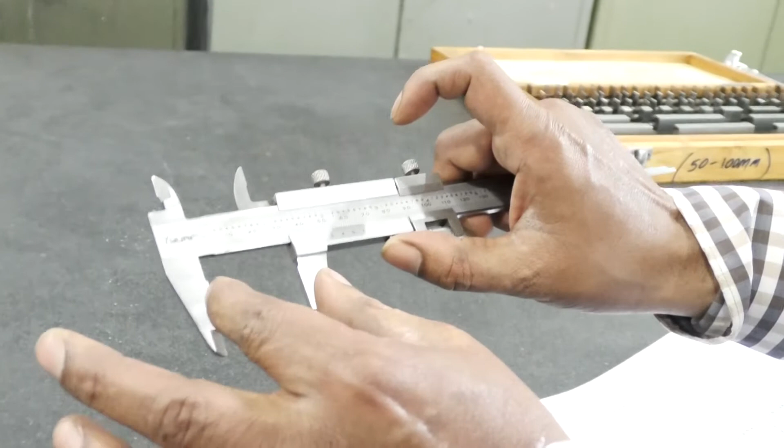Okay. So, vernier caliper, it has two jaws, totally four jaws, and top side two jaws. These are used to measure the inner diameter. So these two jaws we use to measure the outer diameter or outer width also. For example, these two are used to measure inner diameters. Okay, so we can measure outer thickness like this one, by the help of the vernier caliper.

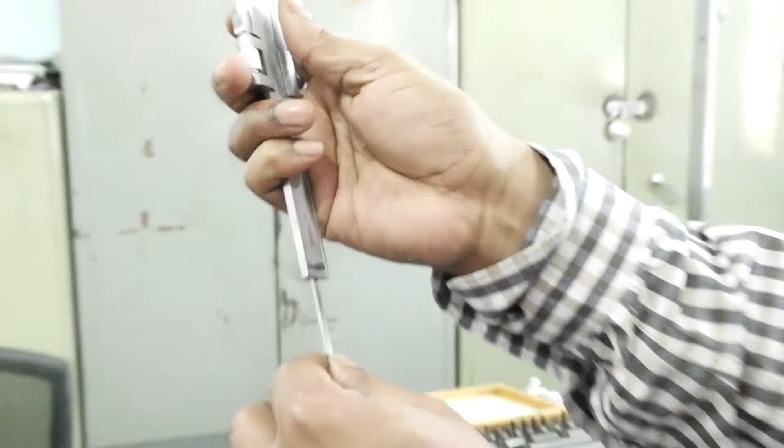So these are the locks to fix the values, locking up the vernier scale and locking up the main scale, to check the readings without any disturbances. So that is the vernier caliper. This strip is used to measure the depths. So that is the main advantage of the vernier calipers.

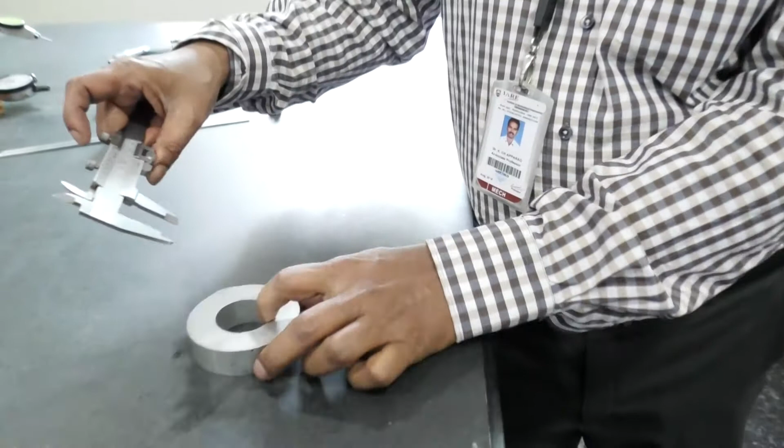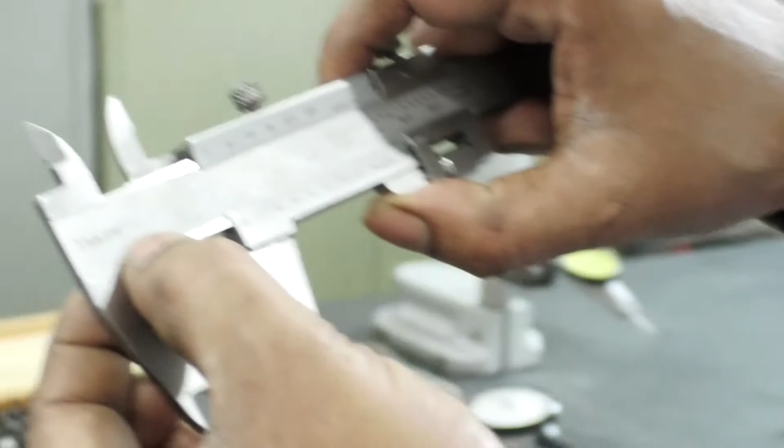So we'll see the least count of vernier caliper. We know that the least count of any measuring tape is 1 mm. But the least count of the vernier caliper is 0.02. Because the main scale reading is 1 mm, and the vernier scale has 50 divisions. These 50 divisions are coincident with the 49 divisions of the main scale.

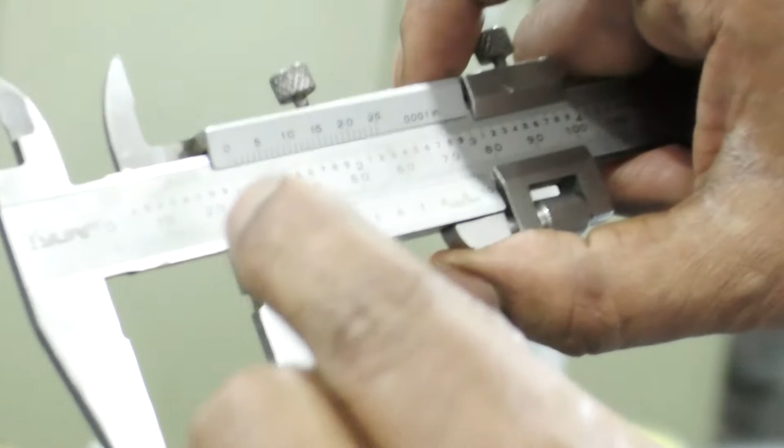So it means the smallest reading on the main scale is 1 mm, and the smallest reading by the help of the vernier is 49/50, because 49 parts are coincident with the 50 parts. So finally the least count of vernier caliper is equal to 1 minus 49/50, which is equal to 0.02 mm. The least count of vernier caliper is 0.02.

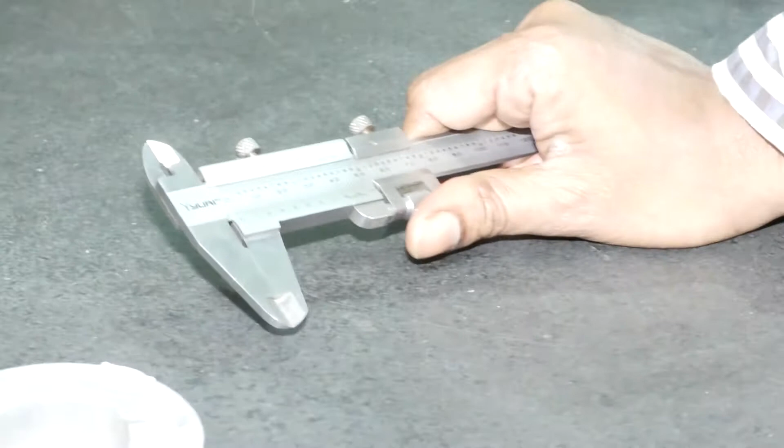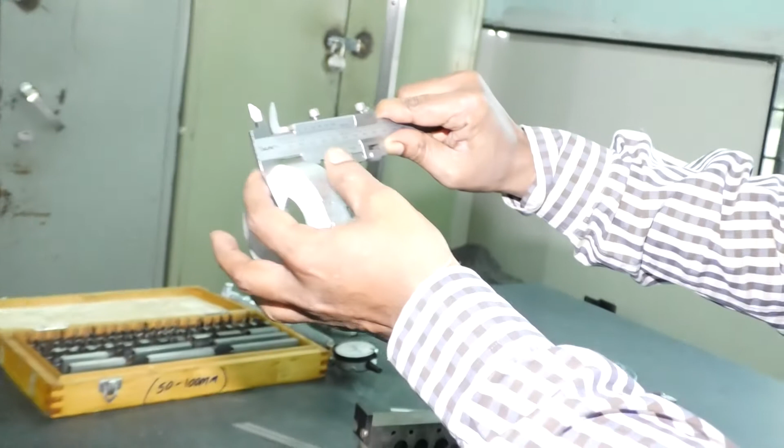So how to measure? For the measurement of any particular job, first of all we have to measure the main scale reading. That is 20, nearly zero coinciding, that is 20. Next, the coinciding of the vernier reading. The coinciding of vernier is 10. So 10 into 0.02. So main scale reading 20 plus 10 into 0.02. You have to add the values, then you can find the final value. So that is the process of how to measure linear measurements by the help of vernier caliper.

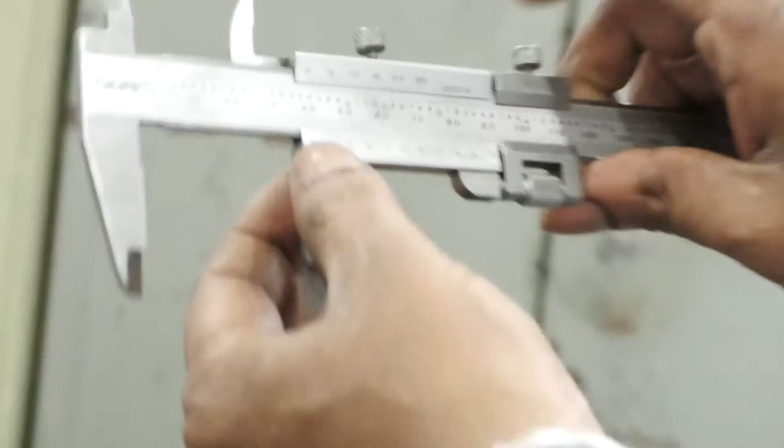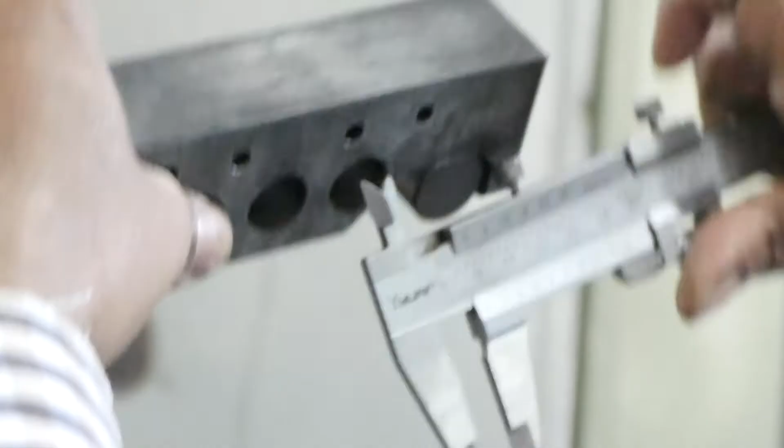So now we'll see. There are two scales. One is the main scale, another one is the vernier scale. Okay, it has four jaws. These two jaws are used to measure the inner diameters, like this. Okay, and these big jaws are used for measuring the outer.

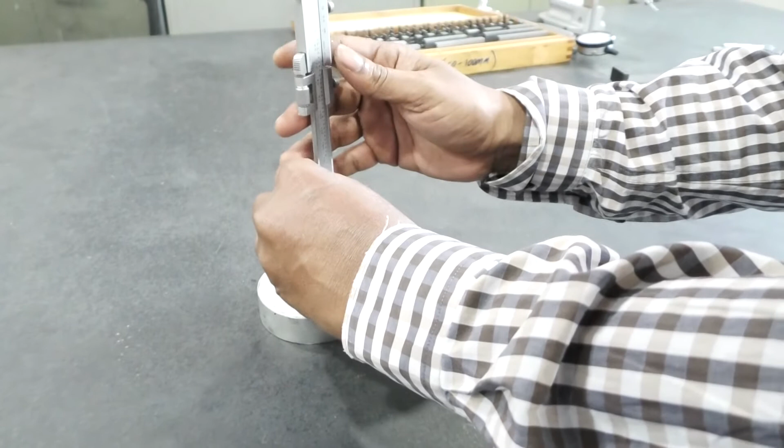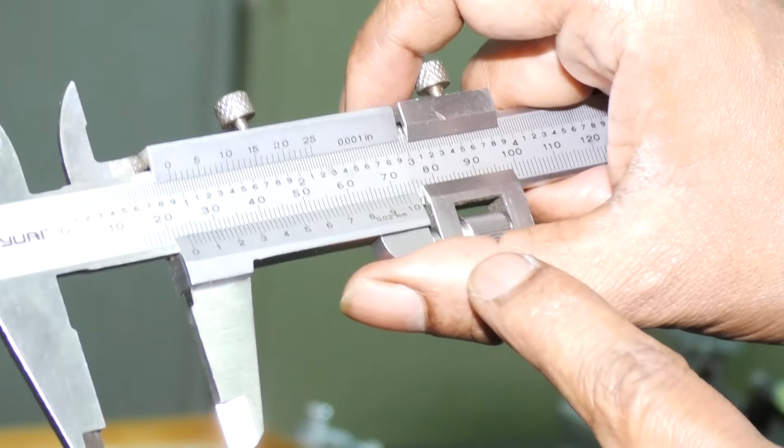First of all, we'll discuss the linear measuring instruments. The first one is the vernier caliper. (The earlier explanation is repeated verbatim.) So main scale reading, 20 plus 10 into 0.02. So you have to add the value, then you can find the final value.